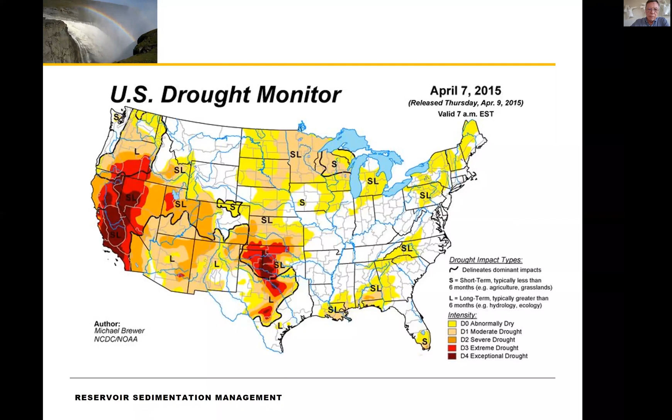I think the important thing that we want to do today is to explain why reservoir sedimentation management is important. And I think where one can start off is just looking at drought situations. If we look at the United States, long-term, multiple-year droughts often occur in the western United States. And that affects every one of us. This is a drought map of 2015 showing intense drought in California.

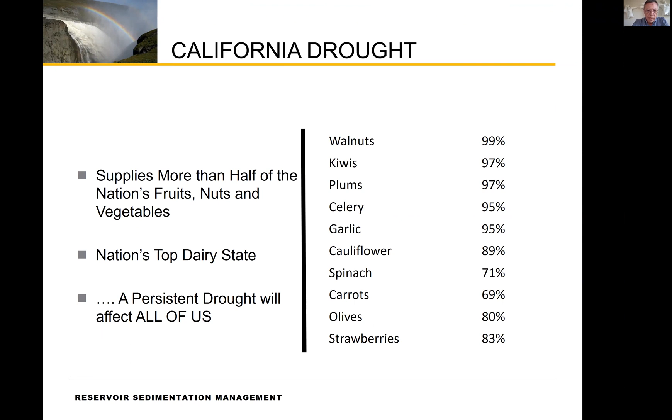But I think why I say that it affects every one of us is because most of our food comes from California here in the United States. And in order to ensure that we can live through these droughts, what I want to do today is to emphasize the important role of dams in securing our water supply.

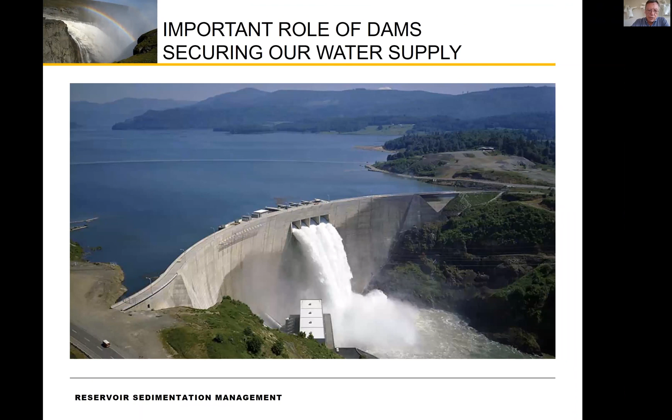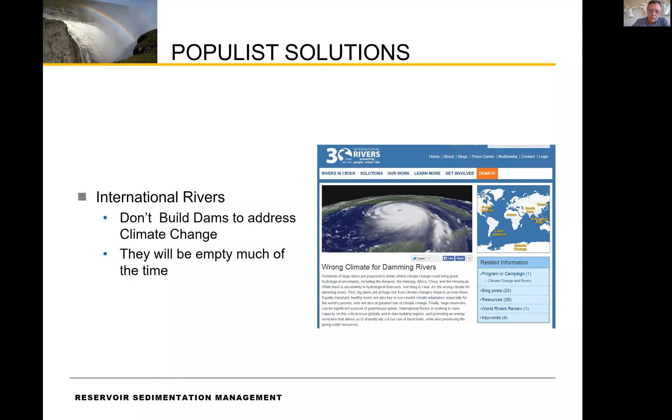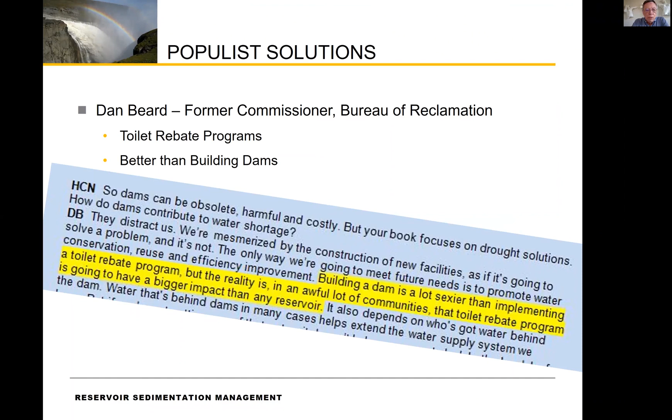Similarly, we have International Rivers, and on their website you'll find that they say, well, with climate change, it's the wrong time to build dams because they will be empty most of the time. And then we have a former commissioner of the Bureau of Reclamation, Dan Beard, who in his book and in his interviews indicates that he believes that the toilet rebate program will be better than building dams. Now, I think what is obvious is that these populist anti-dam groups do not really understand the issues.

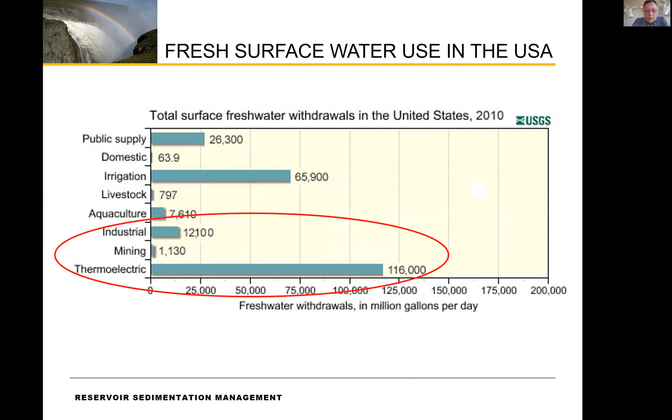This here is a graph prepared by the USGS for 2010 on total surface water withdrawals in the United States and their uses. And I think what most of these populists think of is just domestic water supply, which is actually pretty small. Per day for the United States, about 63.9 million gallons a day goes to domestic water supply. But when it comes to producing food, you can see that we use about 1,000 times more water for producing food. And then for industrial and business applications and thermoelectric power generation, we need about 2,000 times more water.

So I think if we want to talk about sustainably developing our water resources, which is very important for the benefit of this country, the first thing that we need to ask is, what do we mean if we talk about sustainable development? The most succinct and, in my view, the clearest definition has been given in the Brundtland Commission report of 1987, Our Common Future, which dealt with sustainable development. It said that sustainable development seeks to meet the needs and aspirations of the present without compromising the ability to meet those of the future.

Now, if one carefully looks at this definition, what it really does is emphasize the importance of intergenerational equity. And what that means is that we are requiring fairness between generations. Surely, environmental stabilization is important, but from a sustainable development point of view, environmental stabilization is a desirable consequence of sustainable development and is not the objective of sustainable development. And I think this is very important because there's a general use of the word sustainability, which means different things to different interest groups. But what we are really interested in is sustainable development.

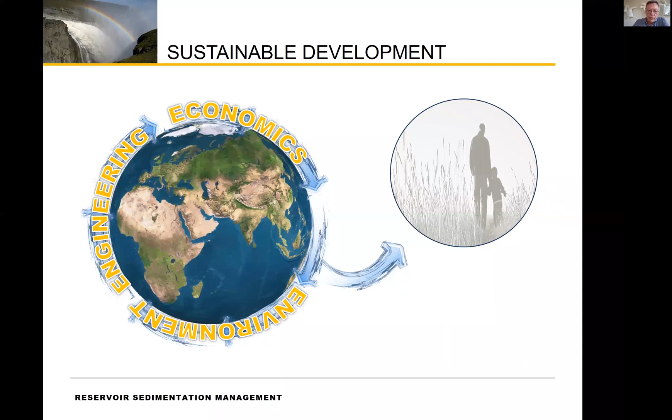So if we want to summarize, sustainable development is to harmonize environmental, engineering, and economic aspects of projects with the prime objective to create intergenerational equity. That is emphasizing life quality not only for our own generation, but for generations to come. So having defined what we mean by sustainable development, I think the next question to ask is how do we sustainably develop a resource?

There is an economist who worked for the World Bank in the 1980s by the name of Herman Daly, and he was very deeply involved in developing the World Bank's sustainable development policy. And he came up with three principles for how we can sustainably develop resources. He distinguished between renewable and exhaustible resources. And he stated that if we want to use renewable resources sustainably, we should use them at a rate that is smaller than the rate of regeneration.

And in the case of exhaustible resources, we should use them at a rate that is smaller than the rate of development of renewable substitutes, which is very difficult. And the third thing is that pollution does not exceed the rate by which the environment can assimilate it.

So in essence, if we look at renewable resources like wheat, as long as our rate of consumption is less than the rate of regeneration, we can sustainably develop a resource like that, a renewable resource. But if we look at mining, which is really an exhaustible resource, there's really no way to say that we can sustainably develop mines or similar products.

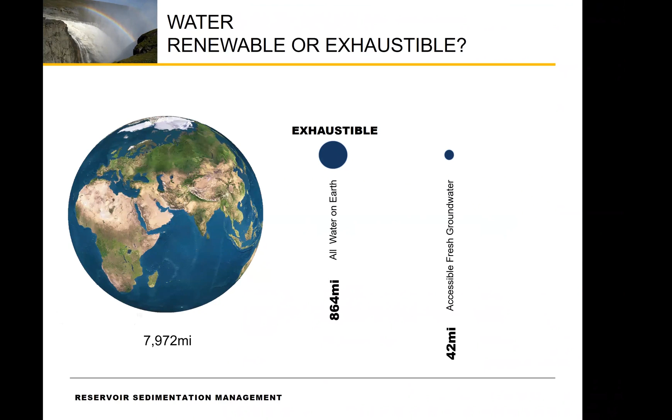But what we are interested in is fresh water. So if we now take all the accessible fresh groundwater on Earth and we put that in a sphere, it'll fill a sphere with a diameter of 42 miles.

And if we take the other resource, that is rivers, and we take all the water in the rivers on Earth and put that in a sphere, it'll fill a sphere with a diameter of 10 miles. That is smaller than the distance that most of us commute daily to work. However, I think the good news is that we can view that as a renewable resource because of the hydrological cycle.

So now the next question is, of these two principal freshwater resources, that is groundwater and rivers, which one of those two has the greatest potential for sustainable development?

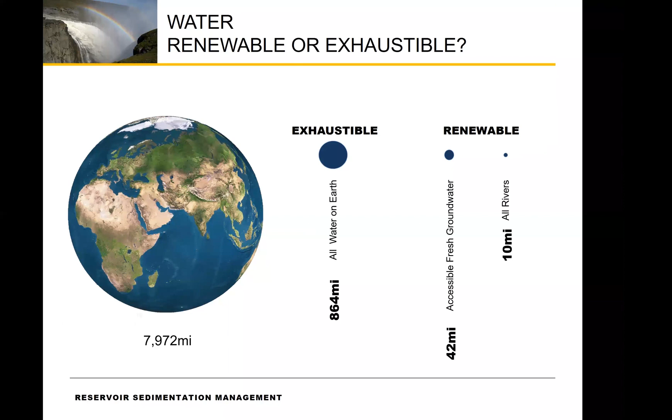So to answer that question, what we can do is to go back to Herman Daly's definition of how we sustainably develop a renewable resource and compare the rate of usage of water to the rate of replenishment of these two resources. And a good proxy to get some idea of the rate of replenishment is the residence time of these resources.

So the residence time is the time it takes for a drop of water to enter at the most upstream end of the resource and move through it completely. And if we look at all the fresh groundwater on Earth, the residence time for that water is 1,400 years. And for rivers, the residence time is 16 to 18 days.

So if we look at this from a different point of view, say, for example, we had the ability to remove all groundwater on Earth in an instant, it'll take 1,400 years for it to reestablish to the state it is in now. And on the other hand, if we remove all the river water on Earth in an instant, it'll take about 2 weeks to replenish.

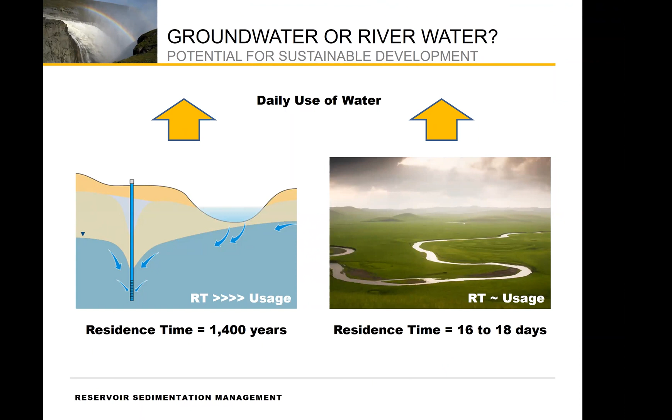So if we compare that now to the daily use of water, we can conclude that the replenishment time of groundwater is much longer than the usage rate of water. So just from a visceral point of view, we can conclude that rivers most probably have a much greater potential for sustainable development than groundwater has. And research confirms that.

This here is a map of the major aquifers in the world, and the ones in gold are the ones that are in peril. And there's a concept known as the groundwater footprint that was developed by the University of Utrecht in Holland and McGill University in Canada. They worked jointly on a project.

And the footprint is the area that you need to replenish an aquifer as it is used. For example, if you look at the bottom of the screen at the North Arabian aquifer, it has a groundwater footprint of 48.

What that means is that the area you need to replenish that aquifer through rainfall is 48 times the area of the aquifer itself. Or viewed differently, the amount of water that is annually extracted from this aquifer is about 48 times of what is replenished.

And if we look at the United States, there's a high plains aquifer that is known as the Ogallala aquifer in the general area where I live. It stretches from Texas to Nebraska and is a major agricultural area. And that footprint is 9, which means that we are extracting 9 times more water out of that aquifer than what's replenished.

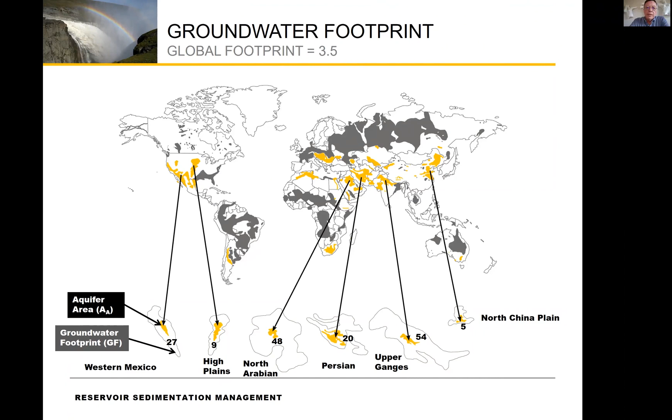So I think what we can confirm is that river water has a much greater potential for sustainable development than groundwater. But the issue with rivers, as you know, is that the flow in the rivers varies with time. And this hydrologic variability requires storage to allow us to reliably supply water in periods of drought or low flow.

And there are essentially 2 time scales we need to look at. One is the within-year time scale, and the other one is a multiple year time scale. So if we look at within a year, this is a hydrograph with flow on the ordinate, and the time is expressed in months, and this is 36 months, so it's 3 years.

So what you'll notice for this particular hydrograph is that the annual hydrographs roughly look the same, and there's one season, a dry season every year, where the flow is lower than normal, and we may need some small amounts of water storage to supply water during those seasonal low flows.

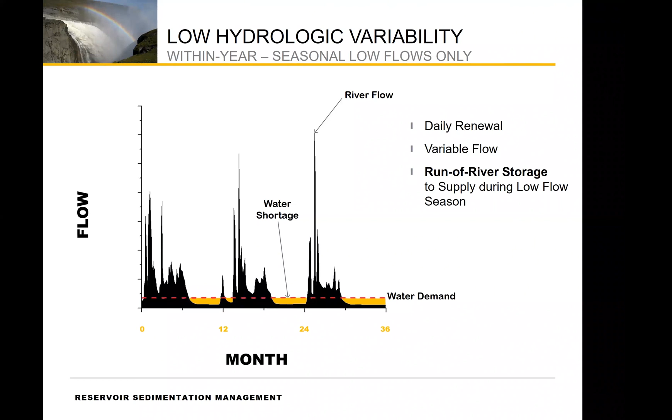But then, in many parts of the world, we may experience multiple year droughts. And in this hydrograph, each bar gives you the volume of water that flows in that river during a particular year. And the red line is the mean annual flow over the long term. So for example, you'll notice here, there is a period of 11 years where the annual flows in the river are lower than the mean annual flow.

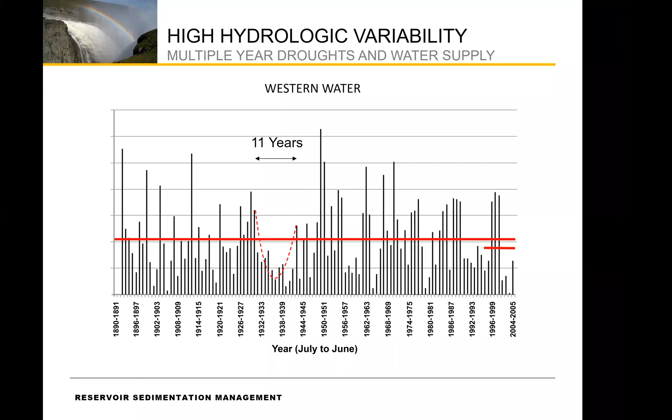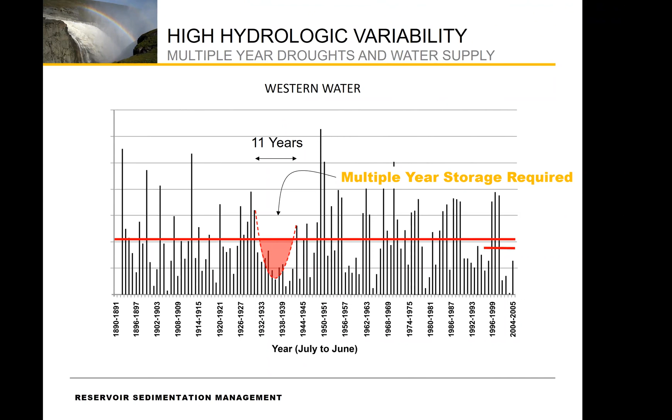So if we want to use a river like this to supply water, we need very large storage to be able to carry us over that dry period. So let's just distinguish in a sort of more graphical way what this means. We can prepare a graph with, on the ordinate, yield as a percentage of the mean annual flow. That means the amount of water we can supply out of that river as a percentage of the mean annual flow. And at the bottom, we have reliability.

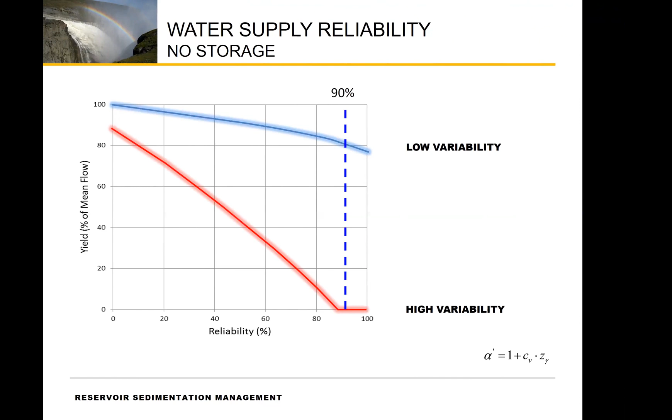So what can we do? If we add storage to this kind of river, and say the storage is equal to 1 times the mean annual flow in the river, then we can change the situation. And what now happens is that at 90% reliability, we can guarantee about 70% of the mean annual flow in this river. So storage is quite an important feature.

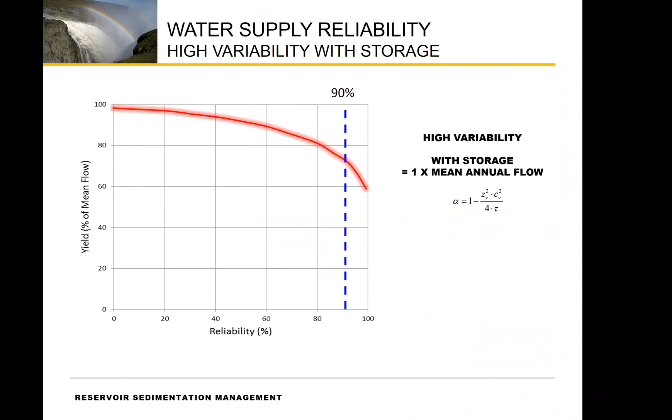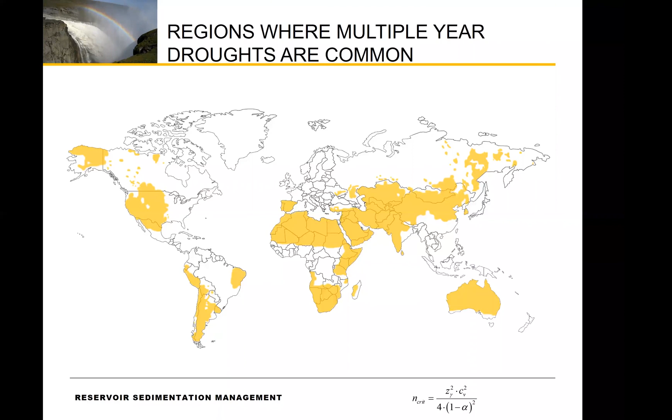What this map shows you are areas in the world where these multiple year droughts occur on a regular basis. And you see here that the Western United States is one of those candidates. But if we want to look forward, what we also need to ask is, if climate change proceeds, how is that going to impact our water supply situation?

And there are 2 important variables. The one is changes in the mean annual river flow, and the other one is how climate change will affect the hydrologic variability of river flow.

Now, there's been many studies that studied how mean annual flow will increase or decrease over the years, and the yellow and red colors here are areas where river flow will decrease. And you see the Western United States is a candidate for decreasing mean annual flows. So is most of Europe around the Mediterranean and other places.

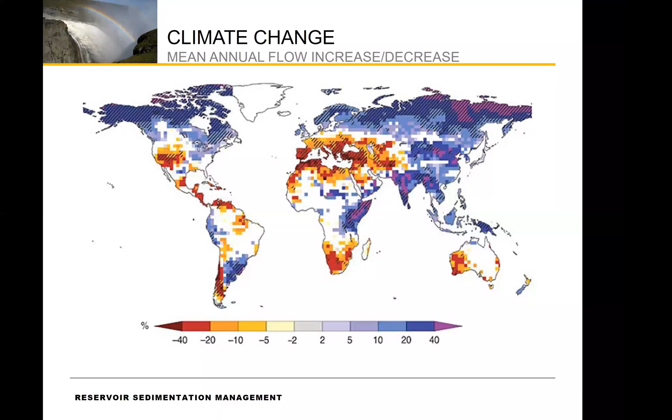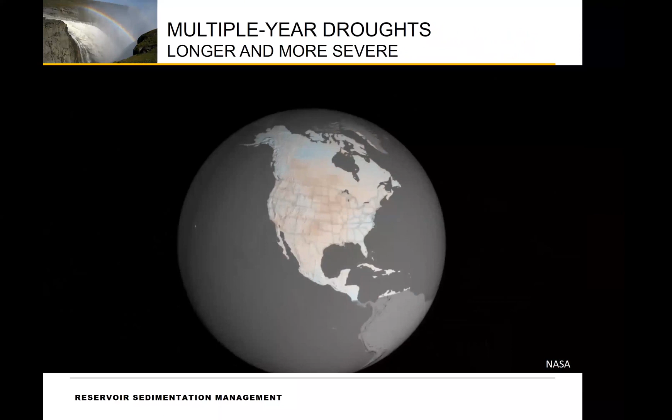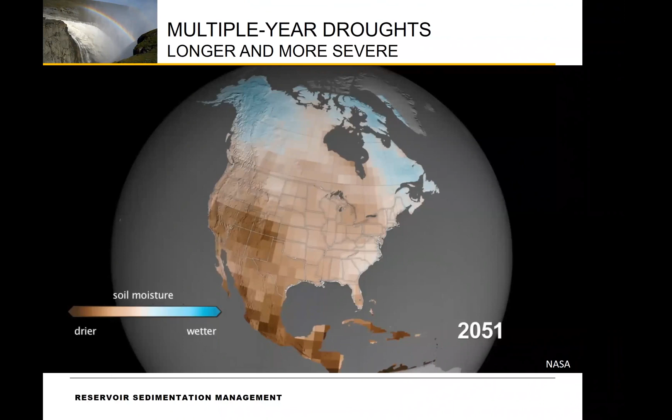But even more important than this is how hydrologic variability is going to impact the reliability of water supply. And generally, climate scientists agree that with climate change, hydrologic variability is going to increase. And these here are some simulations by NASA on how soil moisture will change over time. And what you'll see is that as time goes by, droughts will be longer and more severe in most of the USA. So this is something we need to deal with. So how do we deal with it?

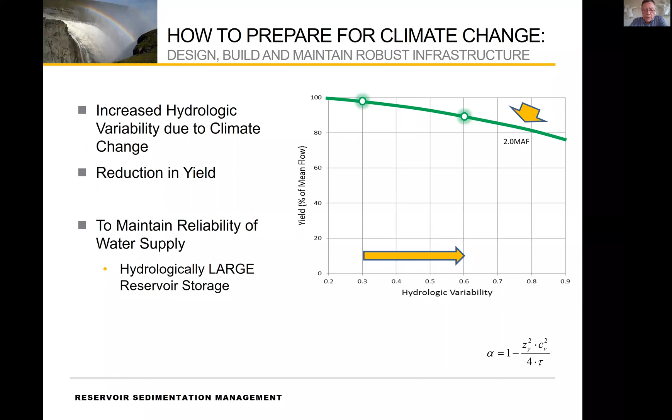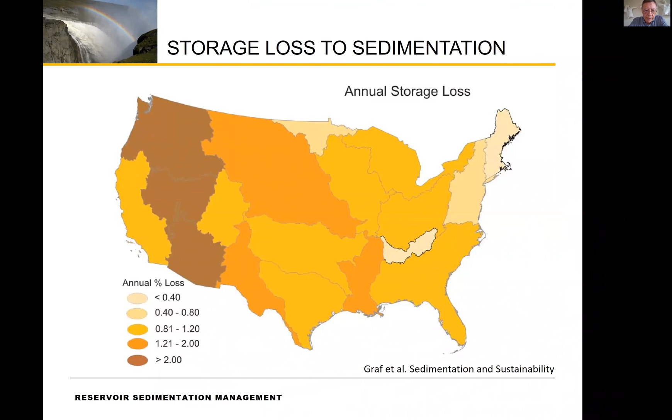But this is not the total story, because reservoir sedimentation plays a big role in determining how much storage space we have available. And if we look at the United States, there was some research done at Colorado State University by Graf et al., and they divided the country into regions showing annual storage loss as a percentage. And you notice that in big parts of the western United States, the annual storage loss due to sedimentation is greater than 2% per year. California is about 0.8 to 1.2%, and you can see the other areas there. So let's just assume that we have a 1% storage loss per year throughout the United States as a general average.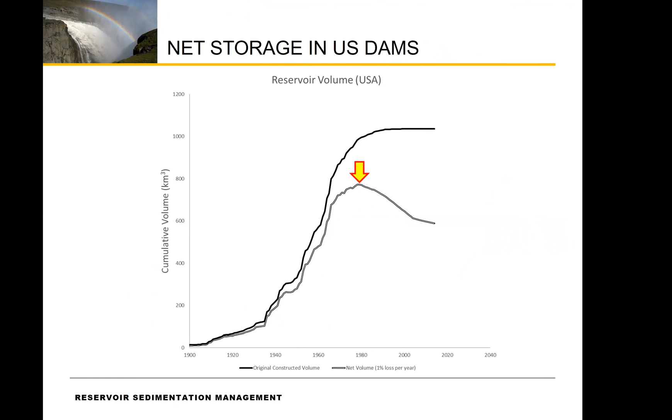What you see on this graph is two curves. You have cumulative volume on the ordinate, and years on the abscissa. And the upper curve is the cumulative volume that we added by construction of dams. And then for the 1% sedimentation rate, we have a lower curve. You can see roughly about 1980, that is where we are losing more storage space than what we're adding on an annual basis. If we go one step further and we say, okay, let's look per person in the United States at what's happened. This here is for an assumed 1% sedimentation rate. You see around about 1972, 1973, that we have a turning point. So what is happening now is the storage per person is on a continual decline.

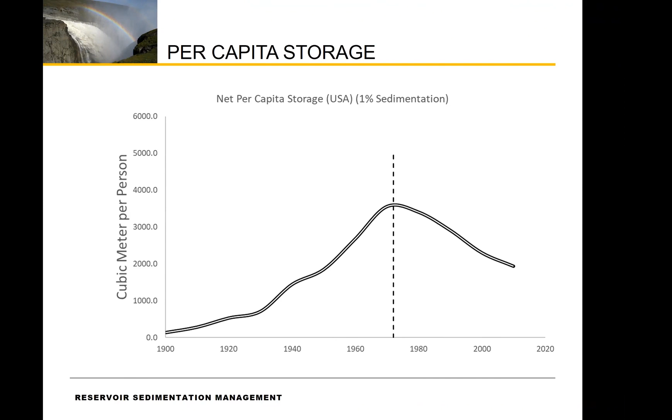Now, what can you do about it? Well, there are various reservoir sedimentation management techniques that one can use. And you can classify them in various ways. This is one way, as to have three categories. One is to manage the amount of sediment generated in a catchment. In other words, we're trying to reduce the amount of sediment going into reservoirs.

The middle one here is to route sediment. In other words, what we're trying to do in cases like that is to keep the sediment transport capacity in the reservoir as high as possible so that we can minimize the amount of sediment that deposits in the reservoir as the flood goes through it.

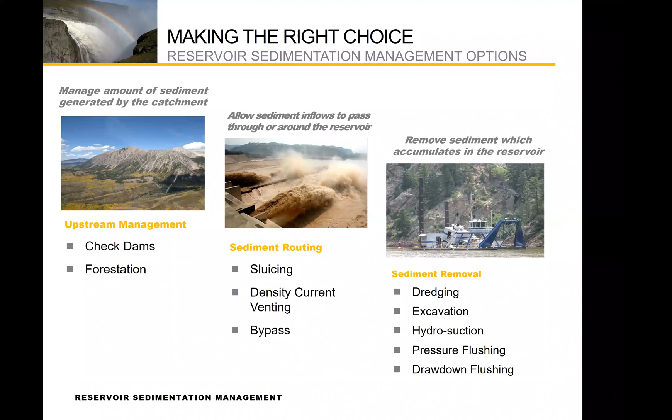And the third group is a sediment removal group. In other words, what we're trying to do there is to remove sediment that is already accumulated in reservoirs to increase the storage space. Now, I'm not going to go through all these methods. That is something that Gregory Morris will deal with in a following lecture. But the message is that there are things that we can do.

Now, the question is, why haven't we done this in the past? And I think one thing that we didn't realize is that reservoirs have a dual nature. In other words, they can be either renewable or exhaustible. And this is a deliberate choice that we make. For example, if we build a dam across a valley, the valley upstream of it is a storage space that we create. And if we decide as designers and operators to allow this storage space to fill with sediment, then we make the choice to classify it as an exhaustible resource.

The alternative, if we design the dam and the reservoir in a manner that we can remove the sediment, in some cases in the world there are examples where you could remove everything, in other cases not everything, but we can get to a stable condition. If we apply those methods, then we can, by choice, classify this resource as renewable. So this is something that we do. We do it in our designs, the choices we make, and the way we operate it.

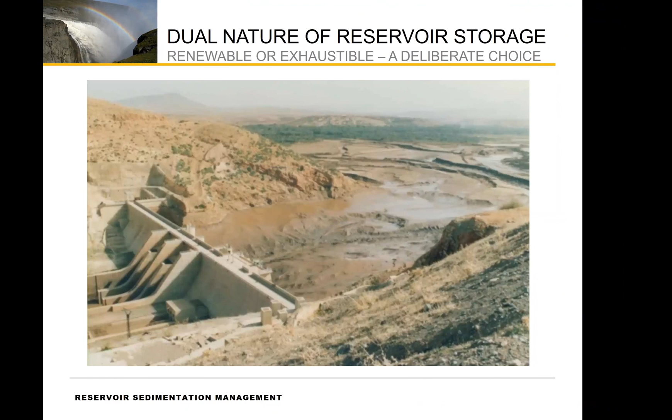Now, one important thing that affects those decisions is how we conduct economic analysis. This here is just a simple timeline. In the bottom are the costs. The first here is 0. We have the cost of constructing a dam. And then at the bottom, those blue dots are the maintenance costs throughout time. And then on top of the line are the benefits that we get out of the system.

Now, and I'm sure all of you in the audience know this, how we evaluate this is to calculate what's called a net present value. So what we generally say is that we believe that things that may accrue in the future are less valuable to us than what they are right now. And one thing that we'll notice is there's never allowance for the cost of storage loss. We don't allow for the cost of removing a facility at the end of the timeline or to build a new dam to supply water.

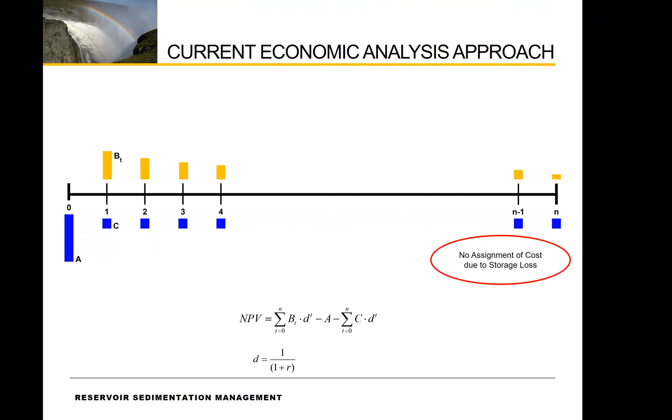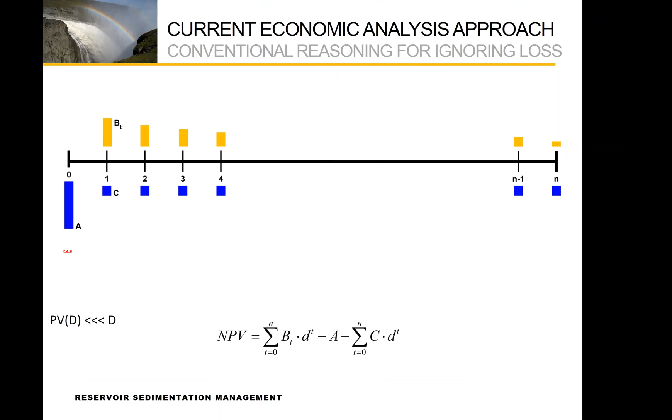So why don't we do that? Well, the thing is that interest rates that have been used in the past, and I must say the World Bank has changed it now, they have a lower rate, but if you use an interest rate of about 10 to 12%, anything that happens after 30 or 40 years is inconsequential when it comes to calculating the net present value. For example, in this case, say we add a cost D to replace the dam or to remove a facility after it's silted up. If we discount it and it's more than 30 years out, its value is insignificant and we can just ignore it. And that is the standard approach.

However, there was an economist by the name of Hotelling, and he authored a paper in 1931 called The Economics of Exhaustible Resources. And that paper never really got any attention until recently, when we became more interested in sustainable development. But what he said is that the price of an exhaustible resource increases with the discount rate. So if we have the price of the resource increase with the discount rate and we discount it, it means that its value doesn't change.

So for example, in such a case, if we would have the cost of replacing the facility in year N and we apply the Hotelling principle, it means right up front that that present value remains exactly the same at D. So this changes the whole way that we can analyze the economic value of reservoir sedimentation management.

I must just say this is the sort of extreme example. What is done to recognize the future importance of future conditions these days is that economists may use a declining discount rate. For example, in the United Kingdom and in France, that is standard practice for long-lived infrastructure.

The other thing that we need to look at is our design philosophy in civil engineering. Conventionally, we use a design life approach. And that consists of planning and design, construction, operation and maintenance, and then we say we dispose of it. Now, for conventional infrastructure, not dams, but say, for example, roads, that is a completely logical way to deal with the problem. Because we may design a road, say, for a design life of 15 years, but at the end of 15 years, we refurbish it, and we can use it in a sustainable manner forever. But if it comes to dams, once the dam is filled with sediment, it is virtually impossible to recover it.

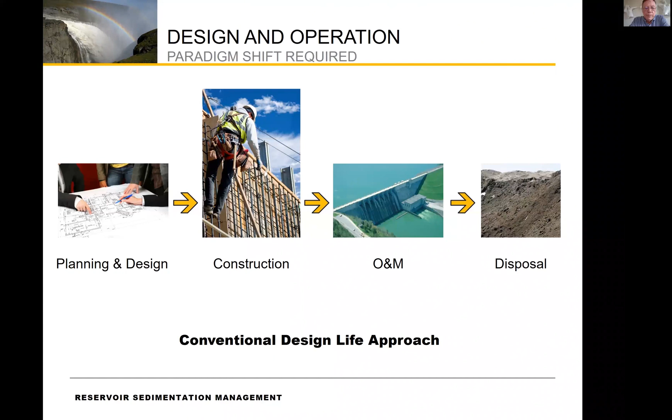So what we've been promoting since about 2003 as part of a World Bank effort is this concept of a life cycle management approach. And the whole idea is to plan and design infrastructure, particularly dams, in a way that we can use it in perpetuity. Now, I know that that sounds like a lofty goal, but it consists of constructing the dam, doing operation and maintenance, removing sediment on a regular basis, refurbishing it, and using it forever.

There are examples of this. For example, Three Gorges Dam, that has got a lot of flack for many other things, but that facility is designed with the intent to use it in perpetuity. There's a sediment management approach in there, and that is what they're doing.

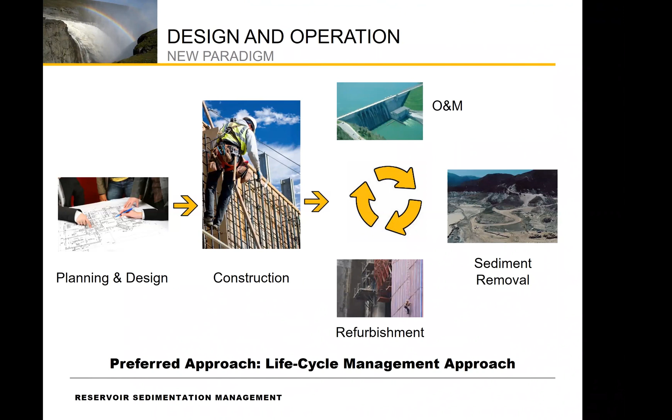Now, how do we implement this? One way is to start with planning for both existing and future reservoirs. And this is a project that I participated in with Fichtner and with Gregory Morris. And we've developed a concept known as the RESCON approach that was originally published in 2003 when I worked with Alessandro Palmieri and others. And we've now updated that. And it's got a software package with it, which focuses on trying to create intergenerational equity.

It implements a life cycle management approach by recognizing the dual nature of reservoirs. It provides you with a means of determining the technical feasibility of sediment management for a particular site. There's an economic optimization in it, and you have a selection between using a constant discount rate of 0, creating a sinking fund to deal with future issues, or using a declining discount rate. It also has a component where you can look at the impact of climate change on sediment management and whether you're making the right decision if you look at all the deep uncertainties introduced by climate change. And it also deals with environmental and social safeguards.

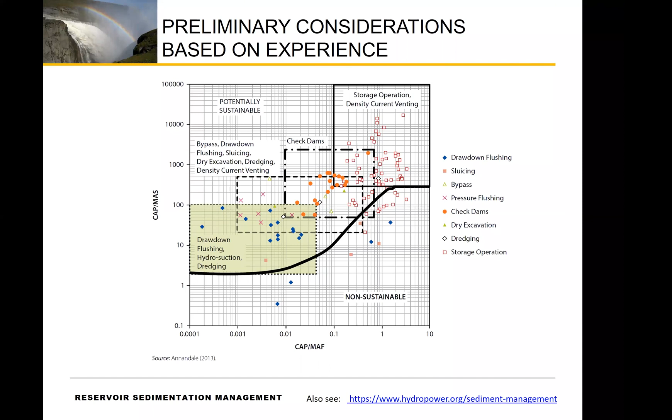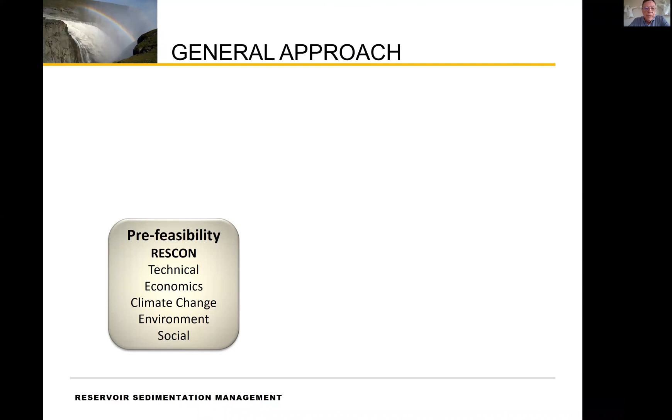So the general approach with this RESCON is that you're working at a planning level, a policy level, pre-feasibility level. Use the RESCON approach to determine the technical feasibility of your project, economic value of it, how climate change may affect it, and you can also look at environmental and social features. Once you have that knowledge, you can move on then to a feasibility study, which is more detailed, and eventually to final design.

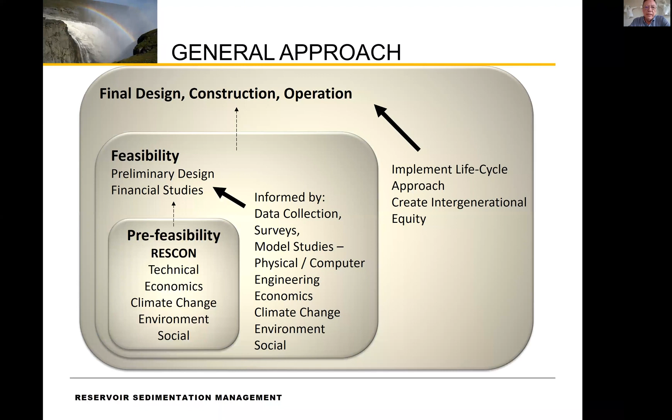So what are the key messages that I try to get to you today? The first thing is, I think we should never use just the word sustainability. We should talk about sustainable development, because that's really what we're doing. And the most important thing of sustainable development is to create intergenerational equity. And to recognize that as important as environmental conservation is, that is a desirable consequence of creating intergenerational equity. The objective of sustainable development is not to conserve the environment, it's to create intergenerational equity, projects that enhance life quality.

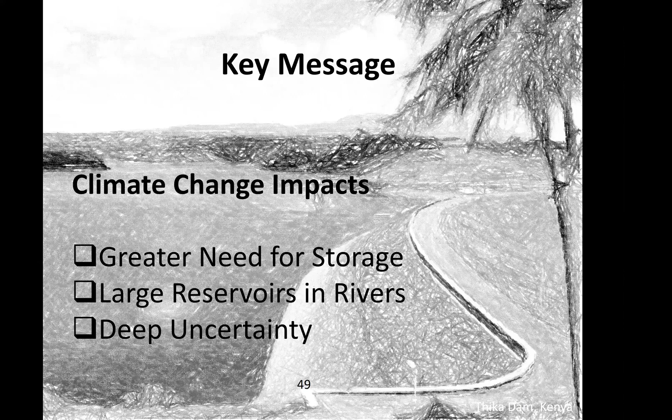Next message is that the preferred water source that has the greatest potential for sustainable development is rivers. Groundwater is less desirable. Thirdly, we have climate change impacts. And one of the biggest impacts of climate change is increases in hydrologic variability. And to deal with that, we need more and more storage space. And there's deep uncertainty that's introduced that we can deal with in, for example, the RESCON approach. Next is if we look at net storage space in the US, and I must also say, this is not only the US, this is internationally, currently we're losing more storage than what we're adding. So we are not preparing for the effects of climate change.

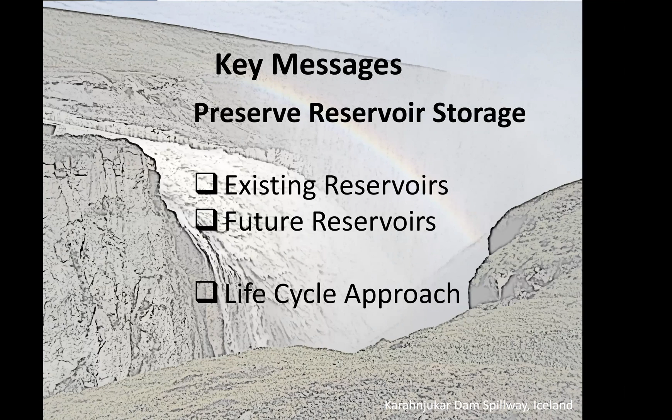And then we need to preserve storage space. Existing reservoirs are filling up rapidly with silt, and we need to figure out ways to increase the storage space in those reservoirs. And for future reservoirs, we need to carefully look how we design and operate them. And we need to move away from the design life approach when it comes to dam design and adopt a life cycle management approach. And then when it comes to the feasibility of sustainable development, it's very important to understand that reservoir storage has a dual nature. It can either be exhaustible or renewable, and we determine what that classification is as designers, as operators. It's a deliberate choice that we make.

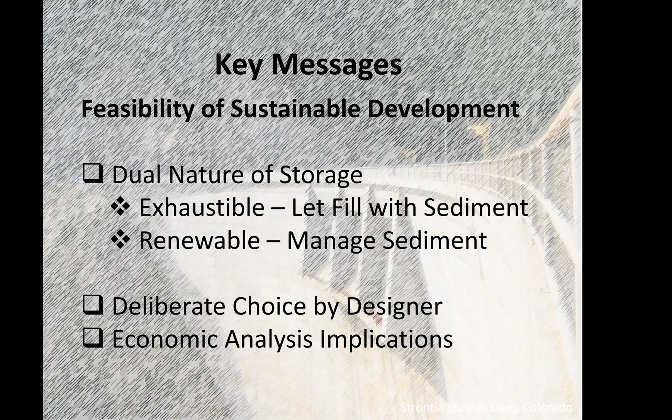And we definitely have to look at the way that we conduct the economic analysis of these projects. And what I've introduced you to, I've just given you notice of it, is that there's the RESCON 2 approach now that provides you with an easy means at pre-feasibility and policy level to look at the technical feasibility of implementing various reservoir sedimentation management techniques in your project. It provides you with a facility to determine the economic optimality of various solutions you may look at, and it also gives you the ability to look at climate change impacts.

So in conclusion, what I want to say is that we need to provide leadership. I think the fact that the anti-dam lobby has achieved what they have achieved in the 80s is partly due to our inability to give leadership and provide understanding of what is important. We have to create intergenerational equity by balancing the engineering, economic, and environmental aspects of projects. It's important to consider the effects of climate change and understand that we're going to need more storage in the future to reliably supply water. And we need to be the voice of reason.